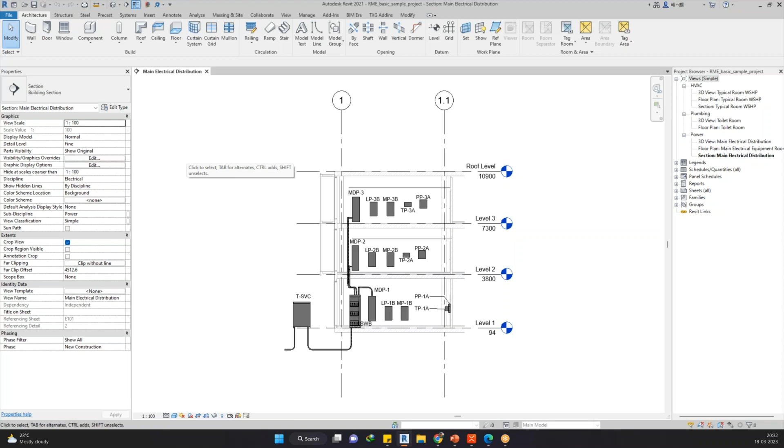Seriously, in my clients, if you see the companies who are earning like 200 crores turnover, they are not implementing automation, but the company which is not even earning 1 crore, they are using automation. Seriously. For example, my company. It's like a 3-year startup. Still, in our company for our projects, we are using automation. Okay, most of the companies in Bangalore and in Mumbai and Delhi, very rare, like 2 or 3 clients I've seen. Okay, fine. We'll discuss that later. Okay, so most of the people are completely zero, and my training is going to be completely from zero only.

I'm not starting from the mid. I don't consider you even at least 20% or 30% into Dynamo, and I'm not starting from the mid. It's completely from scratch. Not even zero, minus.

Okay, so I'm going to treat you like a kid, whether you are a manager, a coordinator, whoever you are. I'm going to treat you like a small kid who is learning something. You are now putting your footsteps into a different thing, a different language. Why am I saying it's a language? It really is a language, because it looks like a tool, but we can't say it's a complete tool.

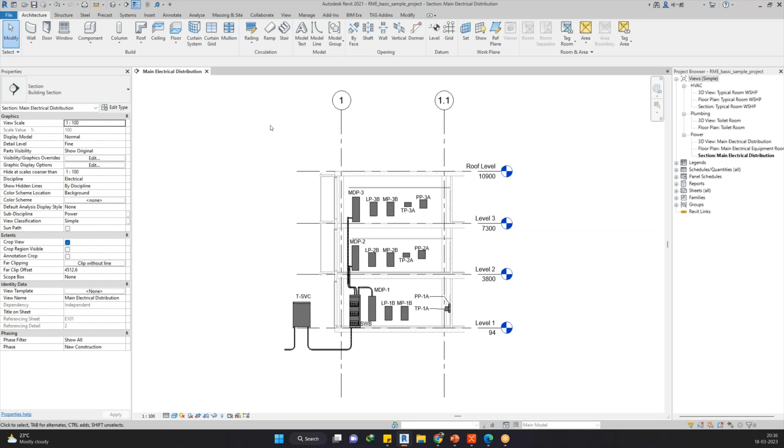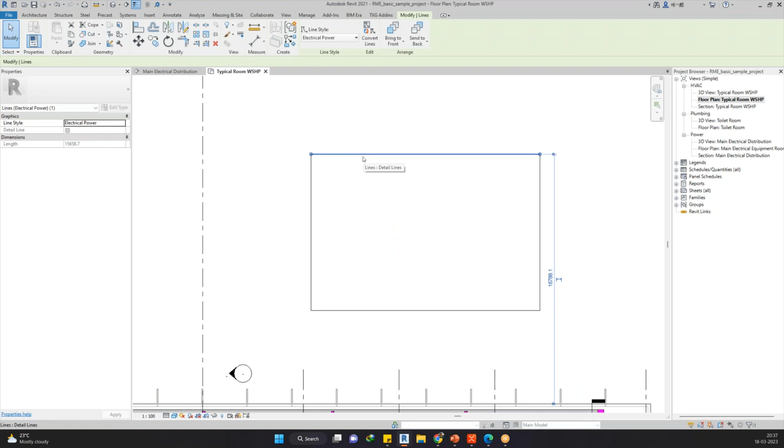Dynamo is an automation tool which helps. Okay, why should I give definitions? Let me show you. For example, I have a floor plan. Let's consider I don't have anything in it, so I have lines, or else I link the CAD file. I have an instruction that each and every line with the layer name wall has to be drawn like this. If you are new to modeling, you come to know this is the wall.

And here this shows a different wall. The wall type and other information would be here. What is its width? What kind of wall is it? Then I have to change the wall again from here, select this, and do this. The next wall would be rated with some sort of tags. Then I'll select this and do this. So how long will it take? And sometimes you make mistakes, correct?

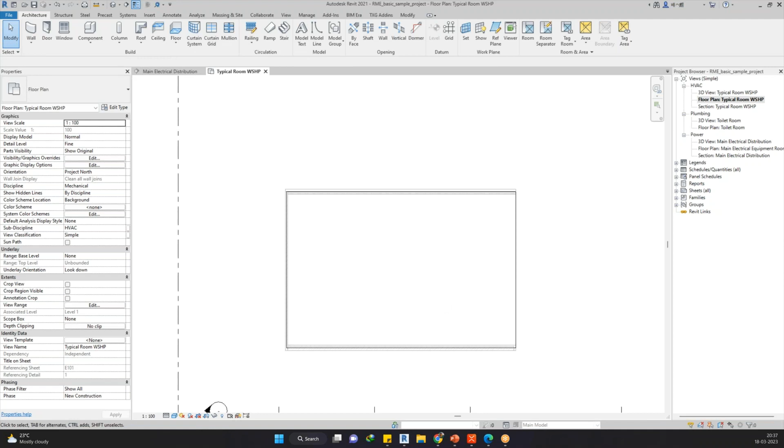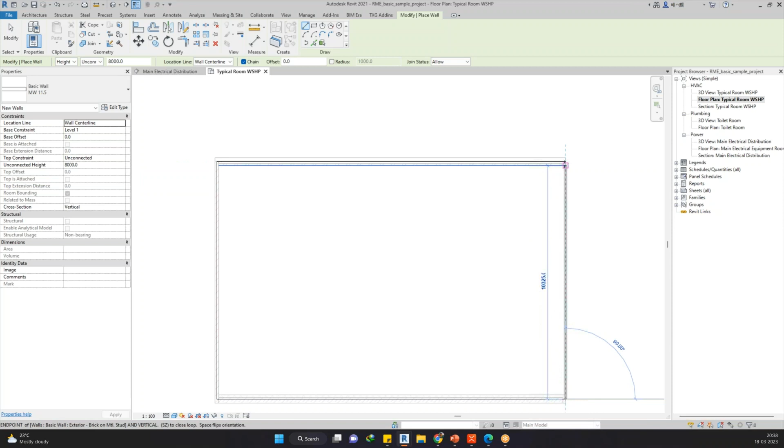But what Dynamo will do here is understand the layer name of this line and what is written over there. It will take those inputs as a human, and then it will do all these tasks. It will go to the Architecture tab, and in the Build panel it will go to Wall, select Wall: Architectural, and read the text. It will go to the family types, select that particular one, and start converting this line into a wall. Is this clear? Yes, sir.

This is just one example. Okay. So a person without a face who is helping you, a person without a face who is helping you to automate. I mean, let's forget about automate. He's helping you with his speed.

Hello. My question is, what is the difference between Dynamo and script? Oh, Dynamo and a script. You asked Dynamo and Revit? No? Okay, script. Okay. So Dynamo and the scripting, let me show you.

For example, this is Dynamo. I hope you are aware of Dynamo, correct? And this is the Dynamo interface. Can you make it a big screen? It's already on a big screen. Let me explain.

The display coming on the monitor, your laptop monitor view, is a little bit small. So if you can maximize that, you can hide the beam area. Not exactly, let me hide all. See, there is a bar here. You have to stretch this bar to the top. Then you can see full screen. Okay, fine. Thank you.

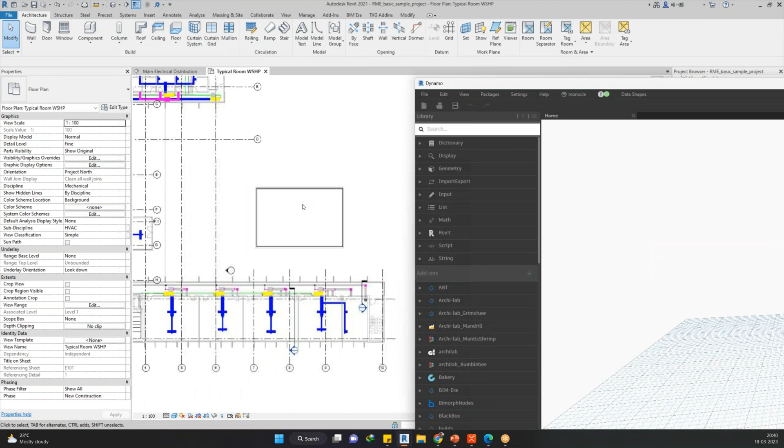Okay, Dynamo and the scripting. So these two are two different platforms. I'm not joking, seriously. Dynamo and the scripting are two different things. Dynamo is completely different. It is visual programming. And the scripting, as you said, is like programming. Let me show you. For example, I've drawn just four walls.

So select model elements. I am telling that I want to select some sort of elements. So I'm finding something here. Select model elements. I can type something here. So do you have any such node which helps me to select some model elements to extract the data or to use it for something else?

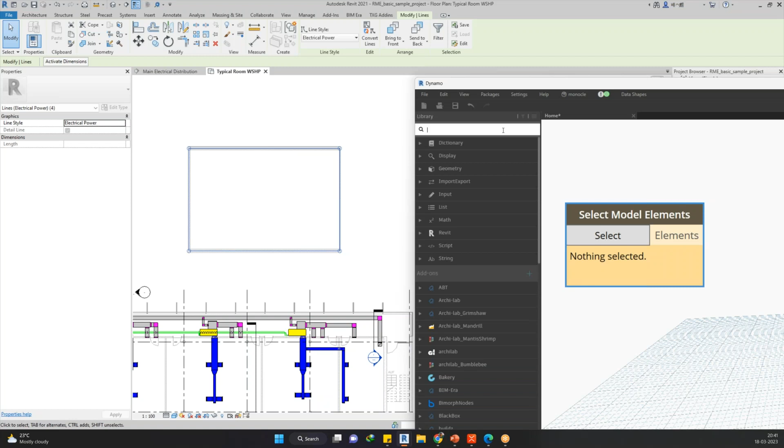So when I click on select, everything in Revit becomes grayed out. Now I have a chance to select all the walls. 1, 2, 3, 4, total 8 elements. So 4 are curves and 4 are walls. So I'm asking, Mr. Dynamo, I want to see what is this wall type and this wall type. How many wall types do we have?

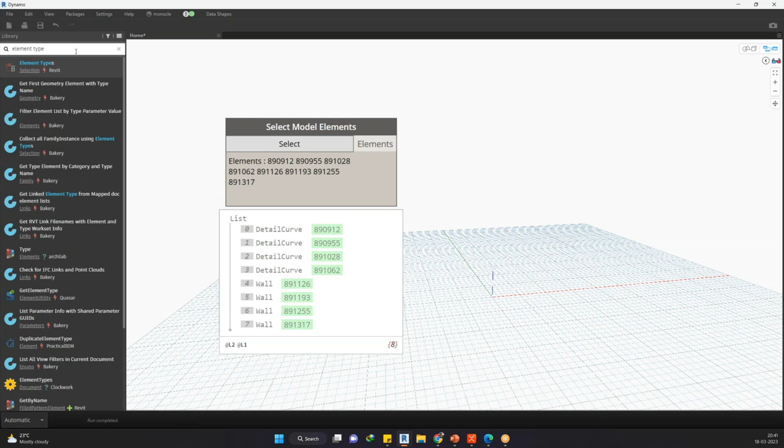So I have an element and I want to get the type of it. Here I can see 1, 2, 3, 4, 5. I got a node here. This node is not created by me, and not created by you. So why are we saying this is a node? Because the full form of this is no code. There is no code required to use this box. It is expecting an element.

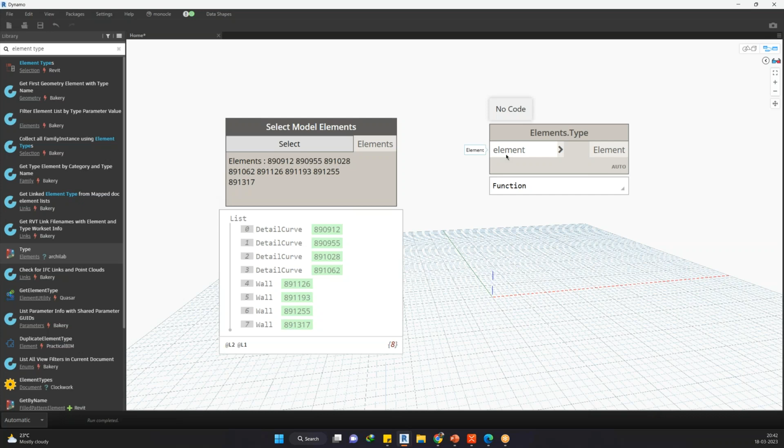Most people know how Dynamo works, but they don't know what to connect exactly, how to connect exactly. I'm going to explain that in just a couple of minutes. Let me clear your question and we'll get into the main stuff. Your question will be answered in 2 or 3 minutes. The main content is going to be explained in detail.

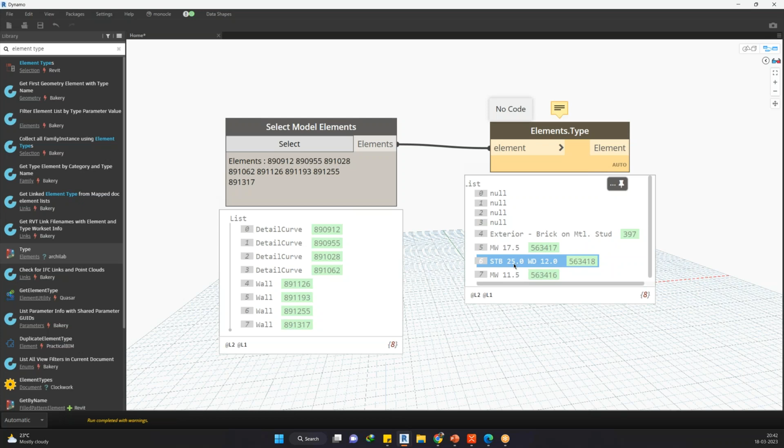So when I connect elements to the element input, it gives me exterior MW 17.5, STB 25.0, MW 11.5. So these are fine. This script is not created by me. But if I want to write the same thing myself, there is another process within Dynamo. It is called coding. Both are completely different. Why? I'm going to explain.

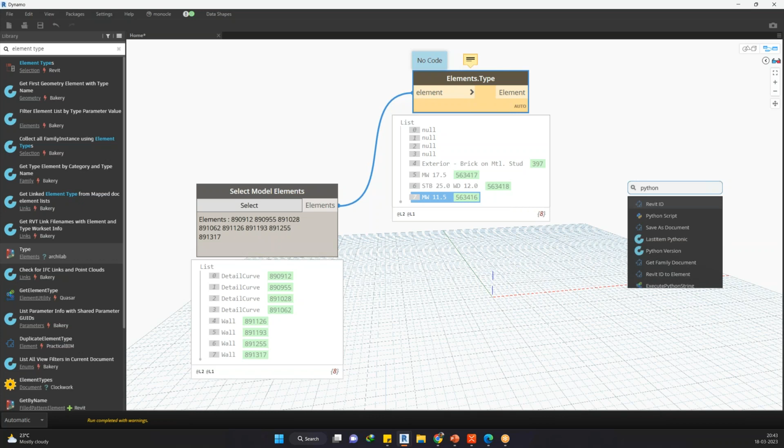For example, let's say Python script. When I double click, this is my coding interface. The Dynamo interface is completely different than this coding interface. So I want to get elements, so I'm going to connect some elements to IN0. This is somehow different. When I connect elements to IN0, I want to get the names of them. Dot name.

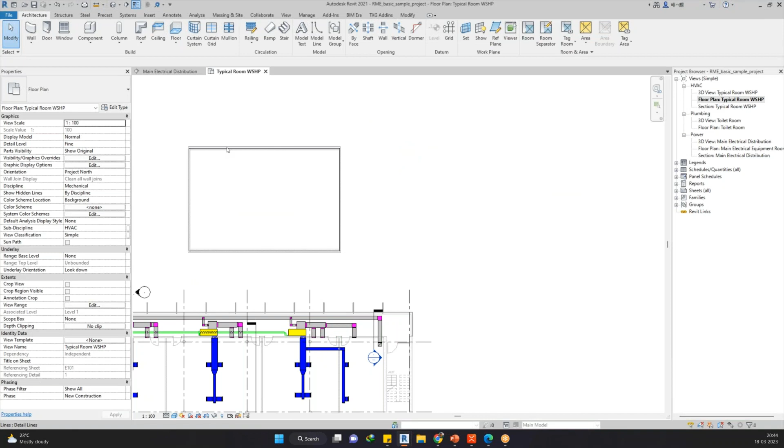Element dot name. What is this dot? Why have you typed name, and why is the N in caps? When I run this, why is it not printing? Why is it not exactly printing? Okay, if I select a model element, when I click on select, let me select a wall. So when I connect this, it is returning me.

I mean, guys, can you see my screen? Because everyone is saying that the screen is not visible. We can see it properly. No problem. Yes, all can see. Vijay, Srijit, could you please check? I can't help you in this if it is an audio issue. Let me stop the screen share, sometimes it happens. Now let me know, Srijit, if you can see it now. Okay, clear?

So this is working for one single element. But when I'm connecting multiple elements, it's not working. You should know the reason why. No, I want to see it at any cost. How? So in coding, you can customize the text here itself. So all elements, so unwrap. Let's say elements are going to be connected here. So in elements.

So let's dot append, and I want to get I dot name of this, and when I close it, let me write something instead. Don't ask me what this is, I'm just clearing your doubt. That's the difference between coding and this. So now it is working fine again. Do you see that? When I connect a number of elements, now it's working. Earlier it didn't work, but now it works with multiple elements.

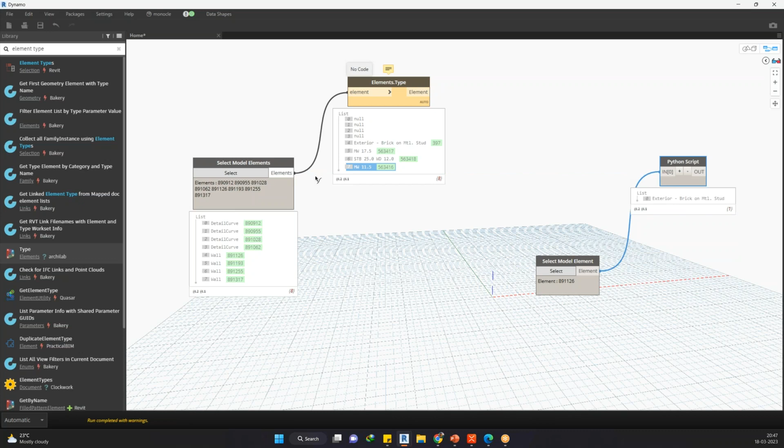Now tell me, will it work with multiple objects? It's working. It's working with a single element and with multiple elements. So this is our process. If you're very new to coding, you have to struggle with all these kinds of steps. If you are very new to Dynamo or to coding, this is what happens. You have to take different steps, and it's very hard to remember if you don't have any coding background.

You are from an engineering background, and you hate coding, to be frank, and you will never get into Dynamo at all. People say, "Arey, there is a quick meeting on automation, let's join." "Arey, I hate coding, please." I've seen many people when I was working as an automation expert. I sent invitations to help with their queries. I didn't ask them to write code with me, I just asked them to attend the meeting. Still, people don't like to come, because they have a negative opinion of coding. They feel coding is irritating and stressful.

Rumors, man. Okay, seriously. Once you get into IT, the way you choose a trainer, a guru, he should give you that kind of motivation for learning. You should connect with your trainers first of all. You have to learn it properly. Okay, fine.

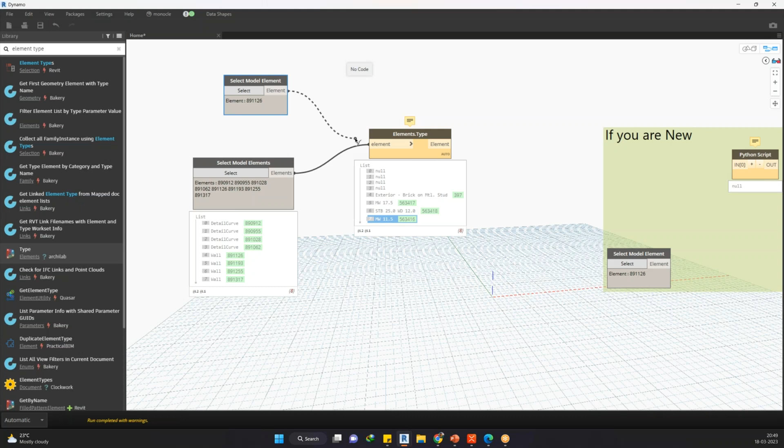It will work. It will work. No, it will work here because it will return an element type. It's working because we don't see these kinds of silly warnings with the help of Dynamo. Because the person who developed this code, they have written it so the user can select multiple elements, or the user can select a single element. So it should work with both cases.

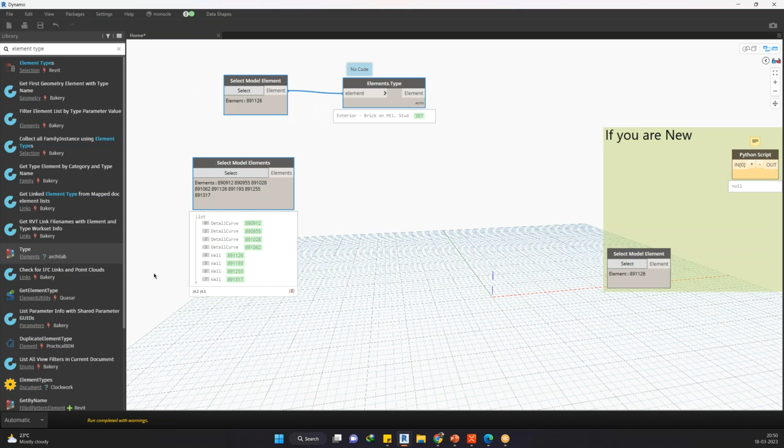The person who developed this code, I'm not the person who developed it. So in that case, how exactly do you get these things done? You have a strategy, you have a strategy that is called node finding. So you have to find the right node which helps you get the element type.

Rajesh, you have experience, so you got it very quickly. But how? What about me? How many hours, how many months will it take? How many years will it take to get the same experience?

Guys, I'm telling you one thing. I'm going to feed you my 5.5 years of experience—it's not 5.5, it's 6 now—so 6 years of experience in just a matter of 40 to 45 hours. Understand? My R&D experience, I've done thousands of hours of experience, R&D, and that's going to be fed in just a matter of 45 hours.

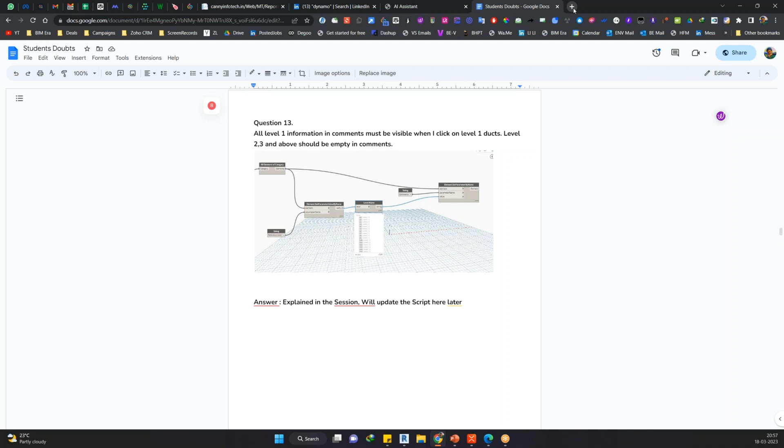And they got their answers in one single document. Every question gets answered in a document. Is that clear? So this is how it is. If you have any questions, first priority would be during the training.

But the next priority is, for example, when you are in office and you get stuck somewhere in the coding, when you are practicing, either me or one of the team members will help you clear your queries. So you will simply text me on WhatsApp: Rajesh, I got stuck somewhere and I updated the document, could you please check.

And question number 13—then if I'm available, I'll sit on it and clear your queries, or I'll forward this to some other person. After you finish, could you share a couple of questions with us? Not exactly, we'll see, because it's the company's property. Okay, fine, let me share. Okay, you can share me your questions, no problem.

Okay, fine, so data types is the main concept. So anatomy and node behaviors. Before we get into this, let me introduce myself.

I'm Rajesh Kumar. I'm the founder of this company, BIM Era Private Limited. We are very few people in it, a small company, just 15. We are purely into automation. We are helping a lot of companies with our automation services, like developing add-ins, creating Python scripts and everything. So why have we chosen this field?

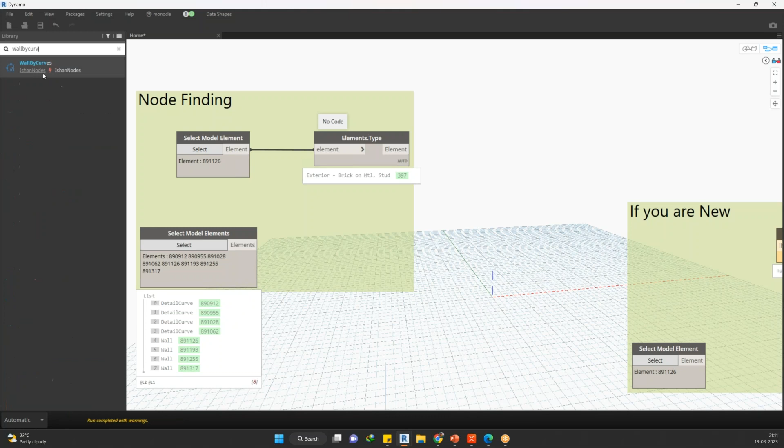Where is my Dynamo? Yeah, here it is. So if I say wall by curves, do you understand anything from this? What does this node do exactly? Just try to understand, this is called visualization. It is called pure visualization.

A person has created a script and named the script with something, it is called wall by curves. So let's consider this a file name, let's consider this a script name. Okay, so wall by curves. Anyone, are you able to understand anything from the name?

Anything from the name? It is clearly saying that you can create a wall, create a wall by curves, by selected curves, whatever. Is it clear?

Is it clear? So they can't name it exactly with this lengthy name, okay? Because, I mean, we don't suggest it. So that is the reason we simplify those naming conventions. So, create a wall by selected curves.

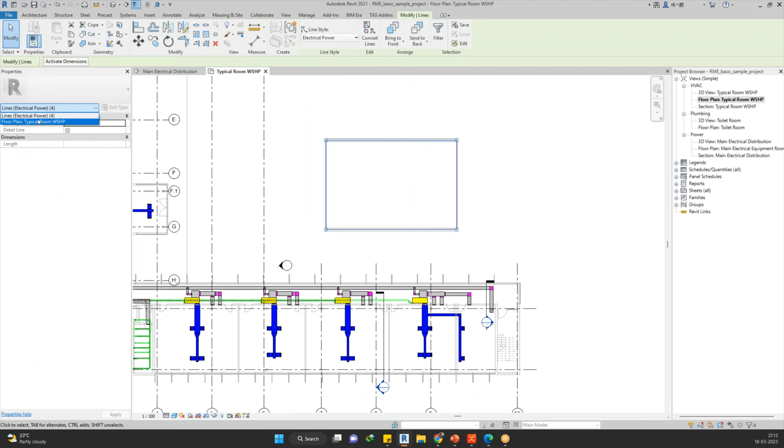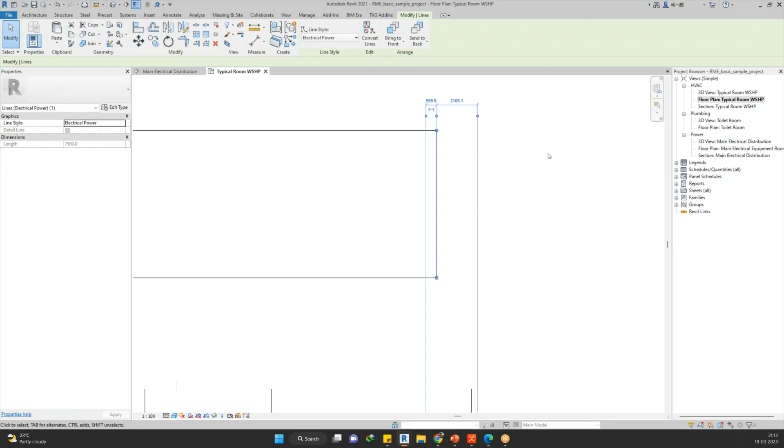So now the challenge is, if I have a wall, I mean if I have a curve here, let's say... no problem, let me try again. So I have a wall. If I have a wall, how to automate this exactly? First I have to select the wall. That is what it's asking, first I have to select the line.

So a line, we can call in geometry a curve, okay. Select the curve, and to draw a wall I have to type WA, and then I have to set the wall height exactly, so let's say 4000. That is what it is expecting, height, and which level I want to draw, and it is expecting another input, so level 2.

And that is exactly expecting here what kind of wall type it needs exactly. So wall type, I have selected something here, okay, and parameter name. What is this parameter name? To which parameter the ID and time is to be added? Oh, when I draw something, when I connect a curve and given the height of this, let me show you.

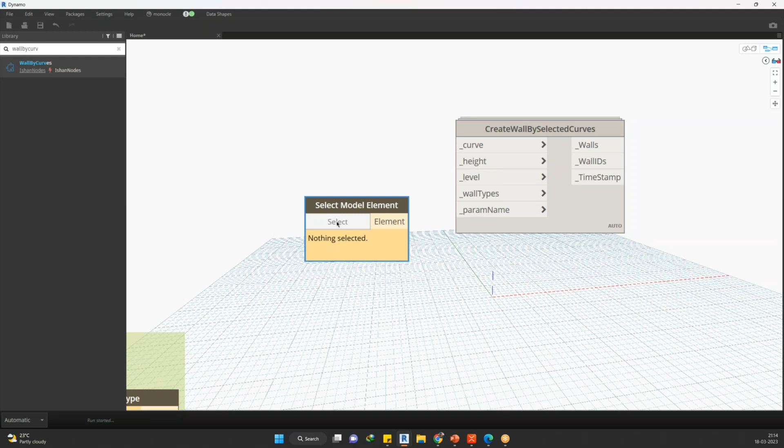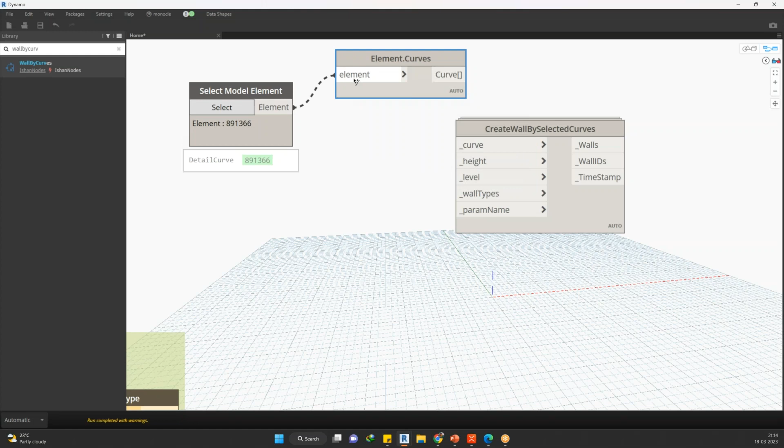Select model element. Okay, let me deselect this. Select model element. So I have selected a line, I connected this. I can't identically connect this directly to this, because this is a Revit element, and it is expecting a Dynamo element. So there is a process, you'll come to know that you cannot directly connect an element to this.

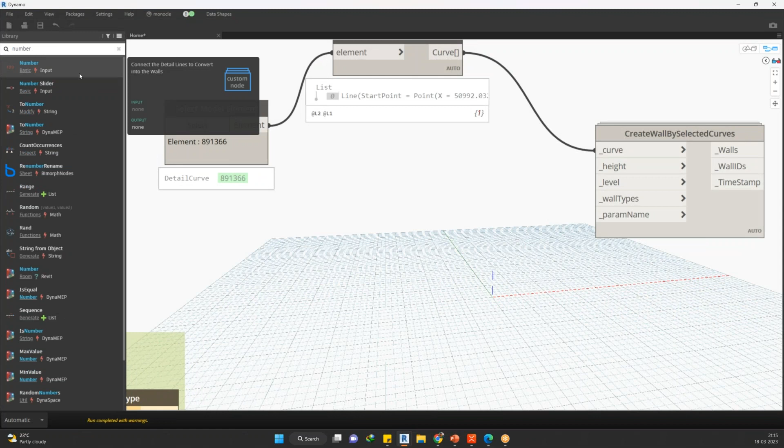Okay, so it is expecting height, so height is a number actually. So when I select this, okay, when I type WA, height is a number, so I have to type a number. So to type a number I use a number node, and I'll say 4000. Connect this to this, and it is expecting a level, so to connect the levels...

Let me try. Yeah, we have a node called levels, because this is a dropdown. Level is a dropdown, so I have to find a node which gives the level information with a dropdown. Simple, so I found that, so I said level 1, connect this to this, and now that is expecting a wall type, and even wall type is also a dropdown.

So let me check, do I have any node which helps give all the wall types, and it is a drop down. Let me connect MW 11.5, connect this to this.

Done. If I go and check, what is this parameter name? To which parameter the ID and the time to be added. The ID and the default value is already in the comments. So let me get into this.

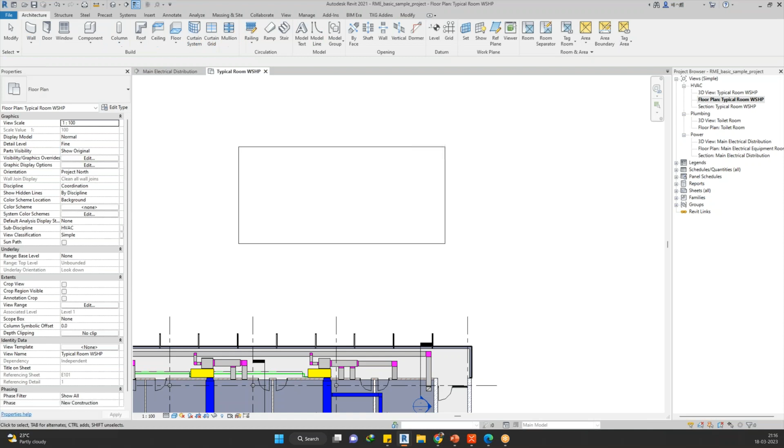Now, where is the wall here? Is it converted? No. What happened? Because element curves is already inside, so I can directly connect an element to this. Now the wall has been created.

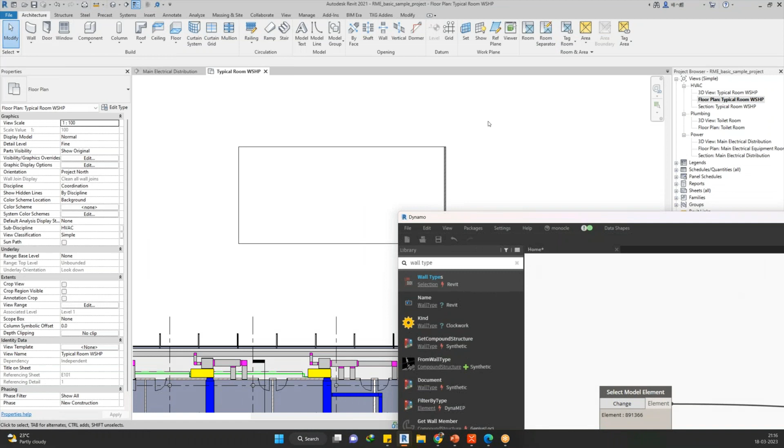If I go and see, I can see the wall, and the height is 4000, and it is level 1 and MW 11.5. Is it clear? So generally, whatever inputs you give, you'll be giving only once.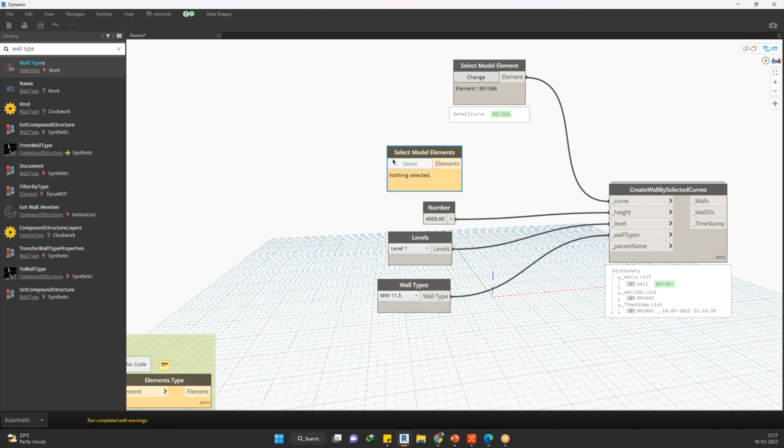If I want to try with multiple elements, same thing. Select model elements now. Select this. Let me select the rest of the 3 walls.

Simple. And when I connect this, what happened? Connect this. So all the 3 walls were connected. See? 1, 2, and 3. The 3 walls were placed successfully.

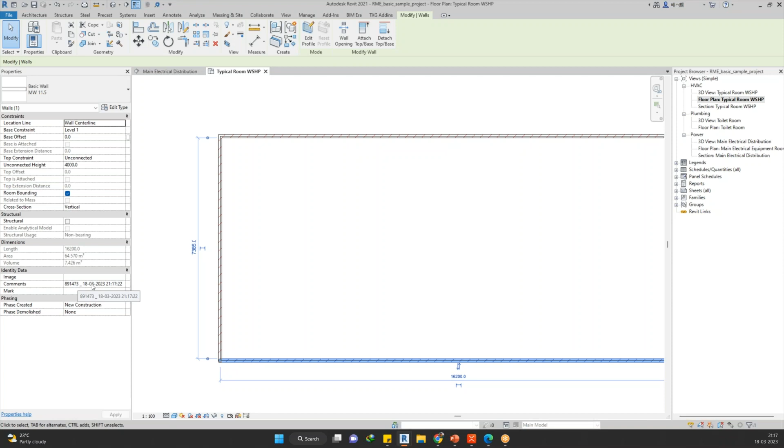Let's try to understand. So we're playing with 2 different sets of elements. It's a quite advanced question, but let me explain in just 1 or 2 minutes. So we have 2 sets of elements: one is a Revit element and the second one is a Dynamo element. So your node should expect something, whether it is a Revit element or a Dynamo element.

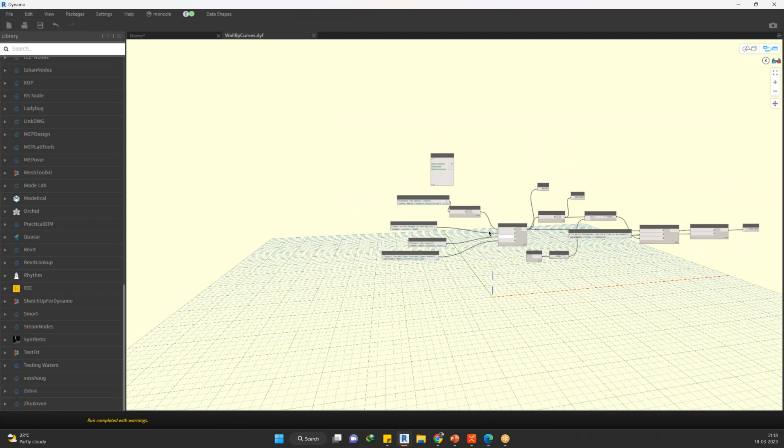So when I double click on this, I can see the code of how this guy was developed, and inside this already placed element dot curves in it. Did you see that? You double clicked on it and it went inside, showing you the code, and this is a different interface. This one is a yellow color interface and this is a white color interface. Both are different, like how you have a family editor. Let's consider this a family editor.

Clear, that this is a family editor. Inside we already have an element dot curves. It means whenever the user connects a detail curve, it converts that into the geometry curve and connects this to this. If not, for example, let me delete this. So the person who created it directly connected the detail curve to this. So when I save this and close this, now the script will not work.

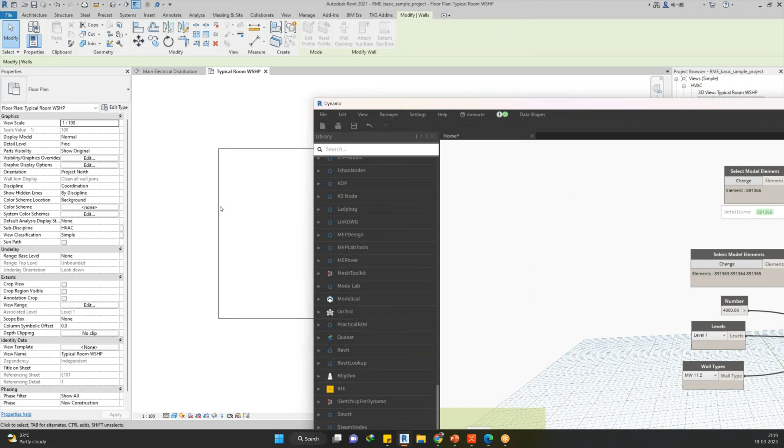I can't see that. Did you notice? There are no walls now. Yes, there are no walls now. So how do we fix that?

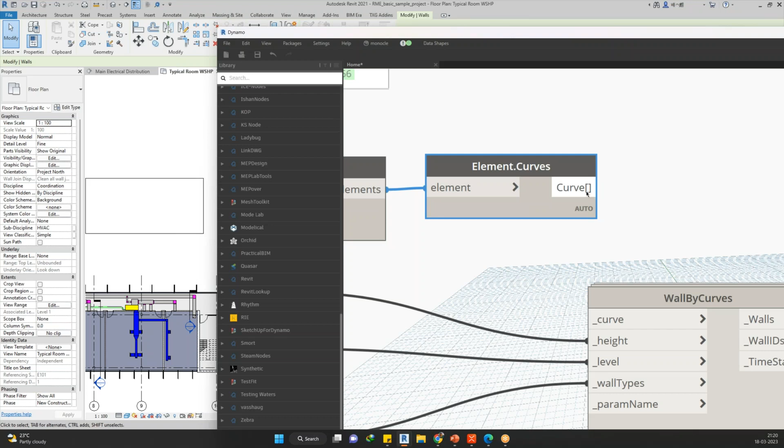I have to convert these elements to the geometry element. To do that, I'll be adding element dot curves outside, and I'm connecting an element to the element, and that is expecting a curve. So we have to connect the curve to this. Now it will start working again.

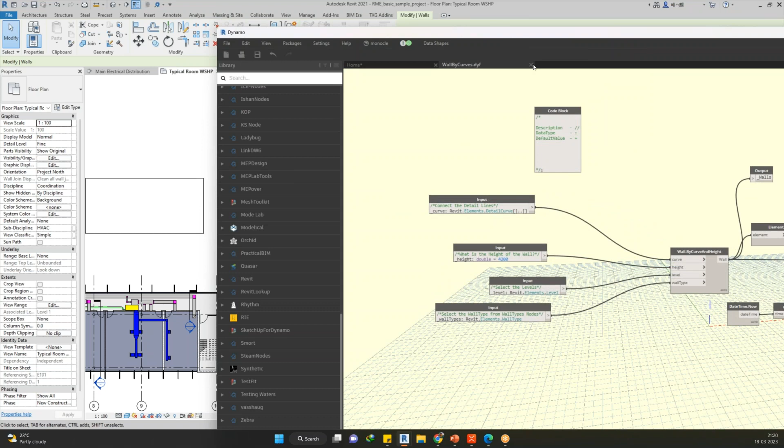So parameter name, what is this? Default value. So we selected model element from Revit, but Dynamo will not accept it directly. So we added a Dynamo node to change it accordingly so that it can. Clear? That's it. Sometimes it acts weird.

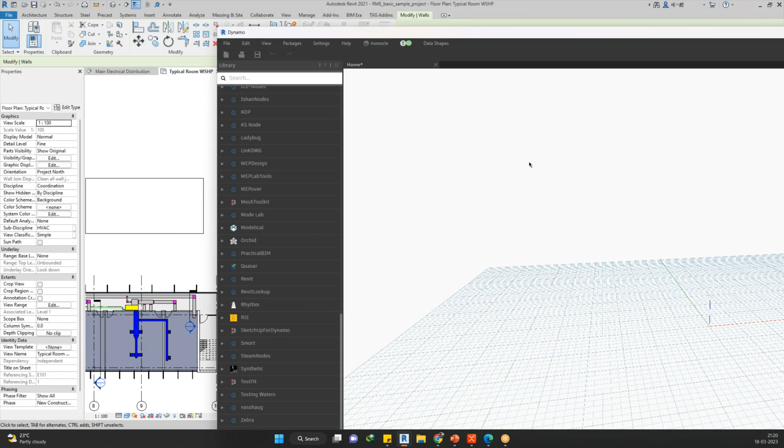This is how, let me copy this. Control N. Just a second, let me copy everything. Control Z, Control N. No, let me paste this. But still, it's not accepting.

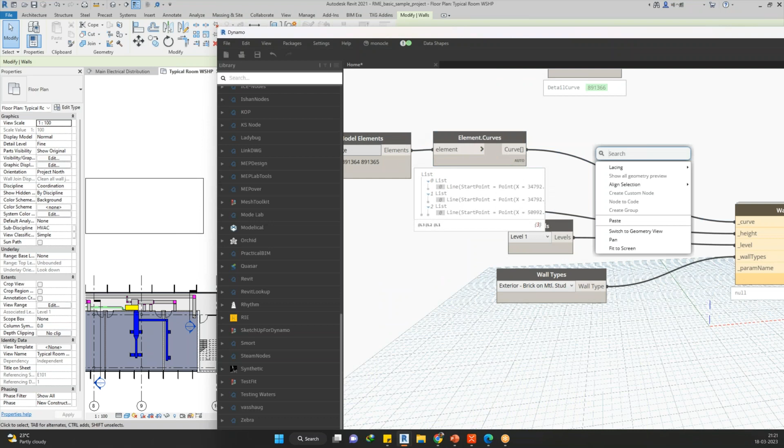When you hover the cursor: detail curve, double level, and this. This is expecting a line now. So here I have to convert, flatten. So you have to do these customizations; it is not exactly like playing as this. You are going to learn all those concepts in our training. When I convert this to this, still it is not accepting something.

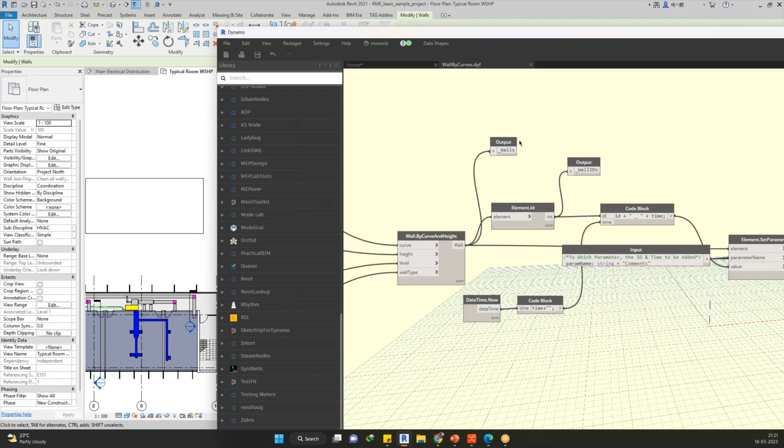Okay, that's the reason. You deleted model elements there? In which one? In the main node, this one? Create by curve, you deleted something there, right? No, no, not that. That's not the reason. It has some other reason. Okay, so this is a part of this actually. Where is that edge? So this is the problem with the dot notation. There are some sort of dot notation nodes there. It's because of that it's acting like that. You're going to learn these kinds of concepts in detail in our training.

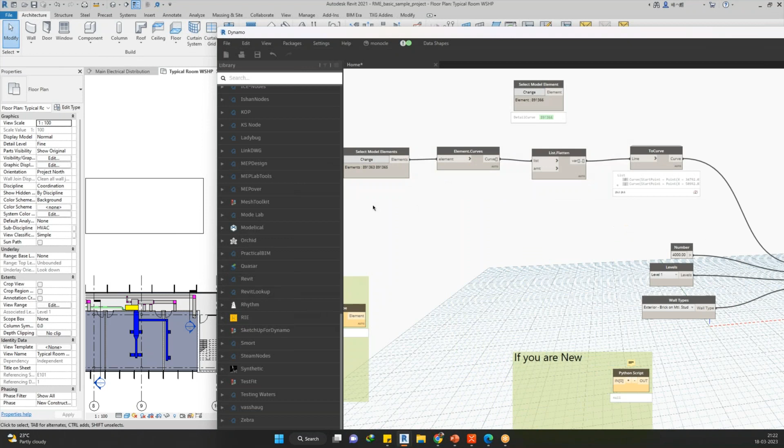Okay, clear. So Rajesh, small question. Vijay here. You are mentioning Revit element and Dynamo element. What is the difference actually? Is there any basic information for that? Not exactly. For example, you have a table in Revit, you have a table in Navisworks. Are both same? No, right? That is only the geometry.

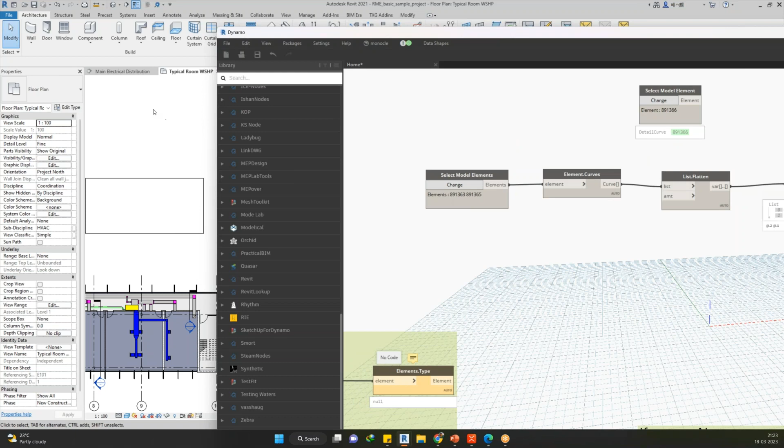It's lightweight. For example, if I see something here, I selected some elements here. So element dot geometry. When I connect this to this, I can see there are 5 panels in this. So this is a Revit element and this is a Dynamo element. Both are the same actually, but here it looks like an element, and here it looks like a solid. Is it clear now? Yeah.

So when you are playing with any geometrical stuff, with points, lines, curves, solids, or surfaces, if you have connected an element and want to extract some different information out of it, then you have to convert that element from a Revit to a Dynamo element first. Simple strategy. Otherwise it won't work. Your nodes will not work at all. Clear? Yeah. Thank you.

Then after that, we have a lot of concepts to be learned. For example, how can I move this? This is at 1250. My engineer asked me to place an array in level 2. I need 5 panels, place wherever you want. I don't have any inputs of at what height it has to be placed. So you have placed around 30 to 50 panels across all the floors. And then finally you have an input: change all the panels to 800 from the bottom.

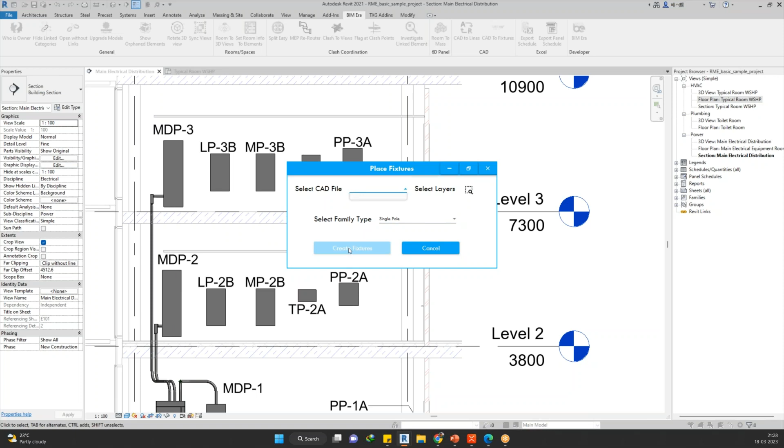This add-in was developed with the help of Dynamo. First we created the Dynamo script and then we converted it into the add-in. So simple. With this, you don't even need to adjust all the lights to the middle of the ceiling grids. Only aligning them would take a lot of days, agree or not? If a light is not exactly in the middle of the ceiling grid, it will kill a lot of hours, and you have to do a lot of cross checks.

When we do RCP layouts, we see a lot of clashes, like a fire detector very close to another fire detector, not even within a 3.5 meter radius. How do you handle all this? If you have n number of detectors that should maintain some radius, the automation will show you a warning if they're too close. The spheres will turn red, meaning two heat detectors or two speakers are very close to each other.

And if you miss a speaker in the restrooms, for emergency cases, it will give you a warning. So you can add your design instructions or your engineer's instructions into it. Understand? This is what it's going to be. Companies have started looking for candidates who can automate this stuff to save time in future projects. Fine.

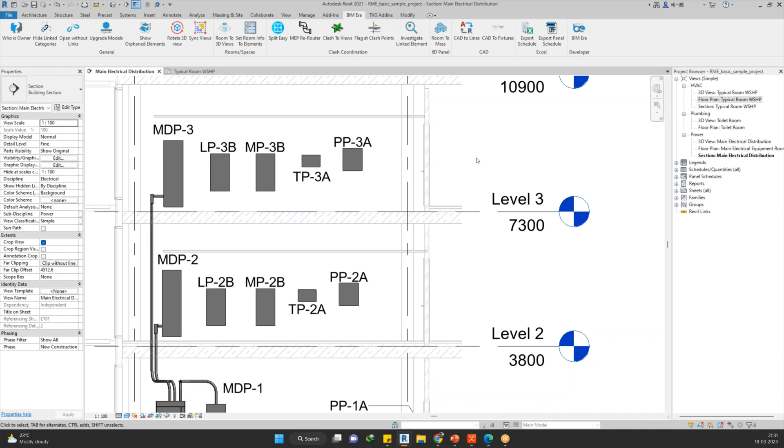But throughout the training, will you also give us these add-ins so we can practice as well? No, we don't give it for practice. It's very easy to use. Okay, fine. Thank you, Rajesh. Yeah, thank you.

Ashwin, one question. Once we learn Dynamo, can we create these add-ins, or is that related to Revit API? Very good question. That is different. Let me explain. This entire training is only on Dynamo. Don't look for any Python coding or add-in creation. Dynamo is only Dynamo. By the end of the level 1 training, you will be able to handle any kind of stuff within Dynamo itself.

Not even coding. Okay, not even coding. Clear? Okay, let me show you. Thank you. So data types is the first concept. Once you learn this concept, you will come to know how to play, what to play exactly, and what the node is expecting.

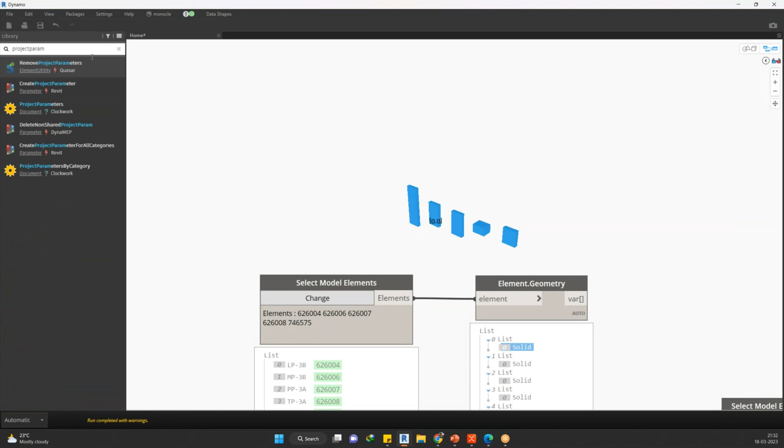For example, let me show you something. Create a project parameter. I have thousands of project parameters. Create a project parameter. So what is it expecting? It is expecting parameter names. So you have an Excel. So how do you get the parameter names from the Excel and connect this to this? So group name, what is this group name? Whether it's an architectural parameter or structural parameter or MEP parameter.

So you will be having groups, no? So what kind of a group is that? So what type is it? Is it a number? Or is it a text? Or is it a checkbox? Or is it a formula? Or what is it exactly? So what is this group again? Do you want to place this under identity data? Or under dimensions? Or under some other company information group, whatever it is.

Okay, so instance, I mean all these parameters are going to be instance or type. That's what it is asking. So for what categories do you want to assign these parameters? Is it for walls? Is it for panels? Is it for columns? Is it for sprinklers, or what exactly? So every information, you will be able to understand how to connect within this first concept itself.

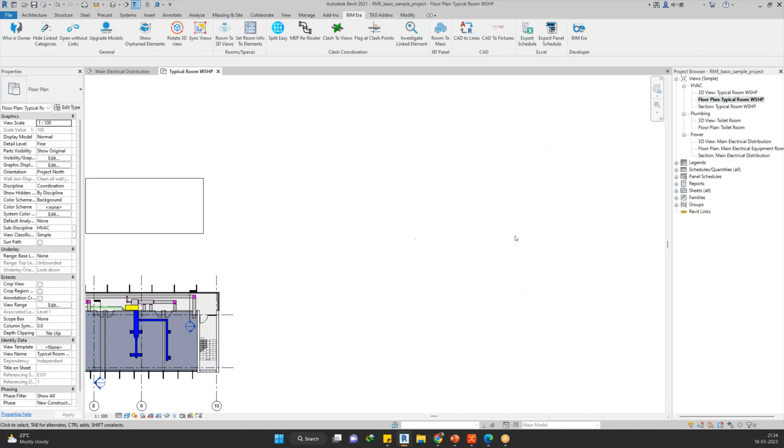Let's say, guys, you have a floor plan here. I'm the person who placed some elements, but I'm not able to see the elements here. What is the reason? Can you please text me in the chat box? I'm supposed to see an element, but I'm not able to see it now. What can be the reason? Tell me. View range. Very good. View range. Work set.

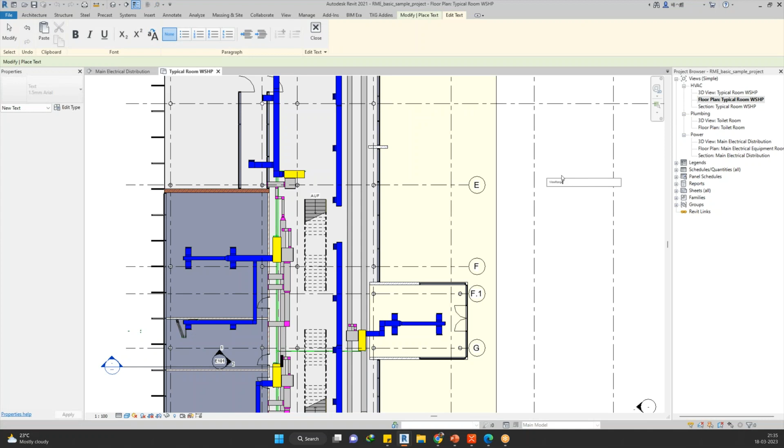Rajesh, can you repeat the question? See, I am the one who placed the elements in this floor plan. But I can't see them now. I know there are like 6 to 7 elements supposed to be here. So the first one, in model categories, maybe it is turned off. Work sets. Visibility. Maybe the discipline mode is different. Discipline. Very good. What else? By filter, it is hidden. Filters. Very good. What else?

Or maybe it is below the floor. Work sets will be off. Work sets, already written. Crop region. Below the floor. Maybe scope box. Plan regions or view range, whatever. Work sets, filters, maybe the discipline you are using. Phase. Element will be hidden. Element hide. Very good. Design options. Very good. That element is from which discipline? It could be anything, just an element, whatever it is.

So you guys are very active, saying if I can't see an element, it could be view range or visibility graphics or work set or discipline. So you first check the first thing. If it is not working, then you'll go to the second one. If it is not working, the third one. If you still can't see it, the fourth one, still not, the fifth one.

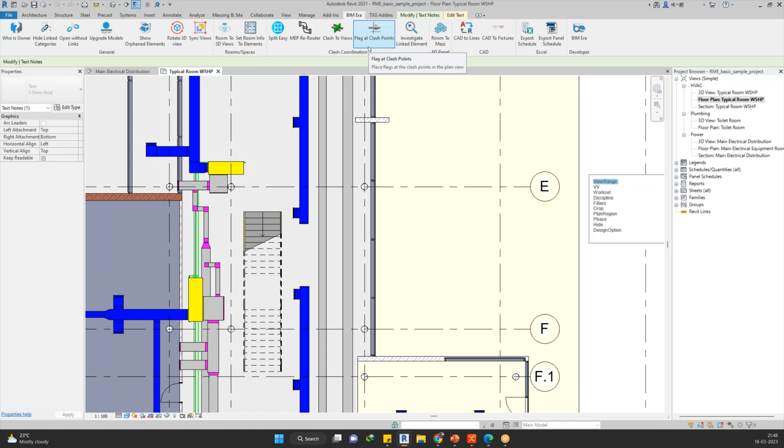Even we don't know, for example, if you type exactly the same stuff in Google, you won't get this solution anywhere. Even I'm somehow surprised where it is exactly getting this code from. So we used to kill a lot of hours to develop our own add-ins here, the BIM Era add-ins. We checked, can you please give me the code for the MEP rerouter and the clash to views and the flag at clash points. So it's giving me the code and it really surprised me. We have taken many years to get that logic, but it's given the logic like anything.

So then we decided, from the day we saw this, we started integrating OpenAI into the training with Revit Python. Generally, to get the logic it will take hours, even if you're a developer. And once you've got the logic, to write the same code and implement it on your interface, it will again take some minutes or hours. So you don't need to do anything. You simply ask OpenAI, it will give you some sort of code, and you customize it. Seriously, clear? So this is what it is.

Initially the level 2 training was 30 hours, but now it is 40 hours. You understand, that is how it is, because people keep on asking a lot of questions. We finished the same training in 30 hours itself, but the last batch took 10 more hours. The trainer is complaining to me, sir, after this integration people are coming with more questions. Let them come, clear every single question until they leave with a happy face.

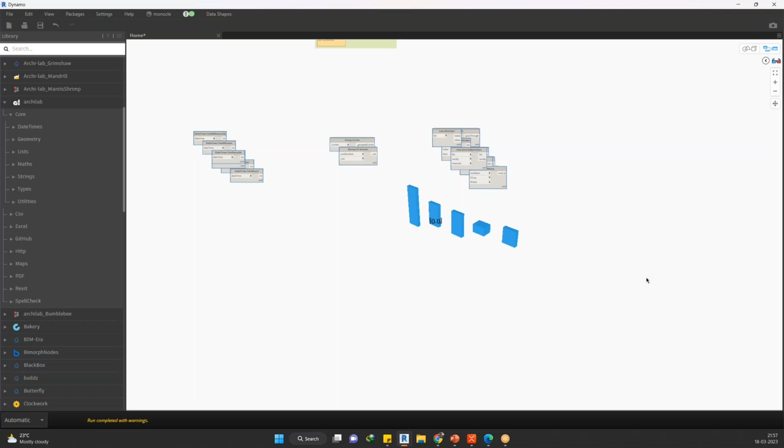On an average, I consider it 1,100, so it's 1,92,000. We have more than that, more than those scripts actually. But you should come to know how to use it, should come to know how to use it. That's what I'm going to focus on. Understand? Clear? Okay, fine.

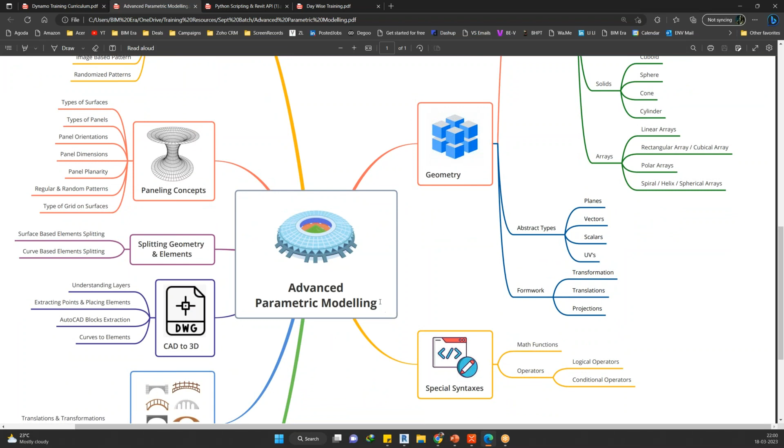How to play with points - what are points? We have coordinate points, reference points. When it comes to curves: lines, arcs, circles, ellipse - how to draw an ellipse, how to draw a polygon, how to draw a NURBS curve, how to draw a polycurve. I'm going to show you some examples. Surfaces - how to play with surfaces, solids, arrays, and planes, vectors, scalars, UVs, transformations, translations, projections. We have a lot here in advanced parametric modeling.

It is for people who are purely into geometry. For MEP people, it's not at all required because you don't create different structures.

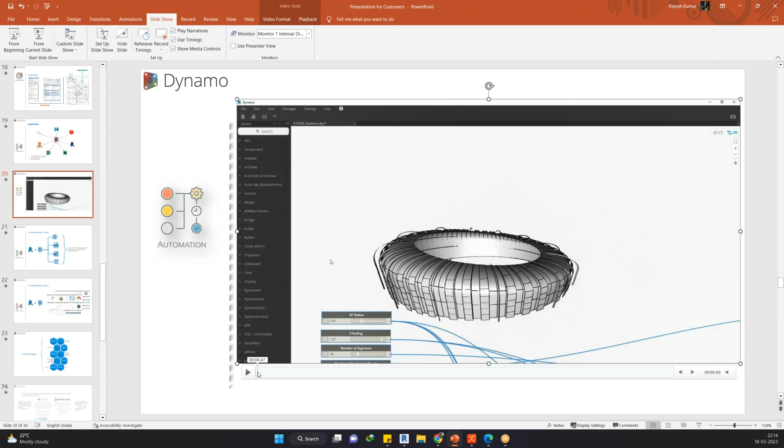I supposed to present everything today, but I want to explain this to you. Is it like scheduling in Revit, Rajesh? Whatever, similar to it, not exactly. Yeah, exactly, scheduling to it.

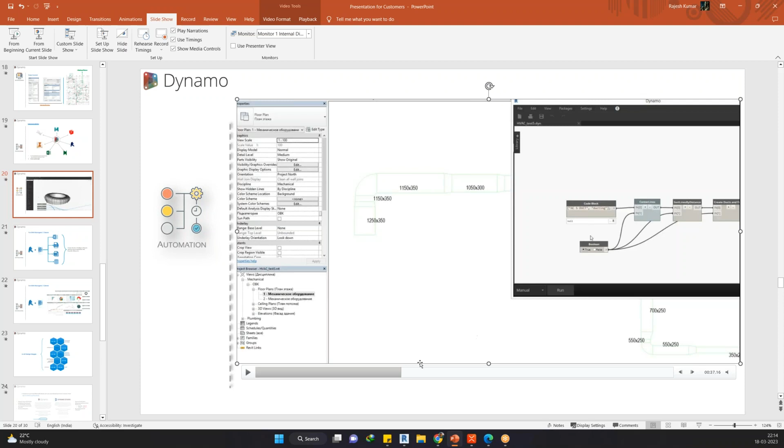So I have CAD layers here. I have a CAD layer, it is understanding the lines. So the input is what we have connected here. The layer name, if you see this, the layer name. And what we are going to do, we have written something in Python here, and boom, the lines are converted into 3D objects.

So this is the reroute, MEP rerouter. This is the MEP rerouter actually, we have already developed. Builder's work, wall openings. So we just created wall openings.

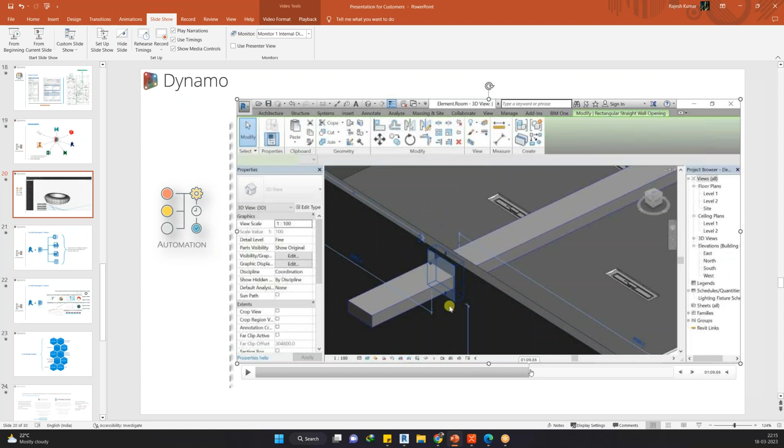Where is the main one? If you move anything, the openings will be also moved automatically. Yeah, this is the one. So we have extracted this. If you notice this, let me play.

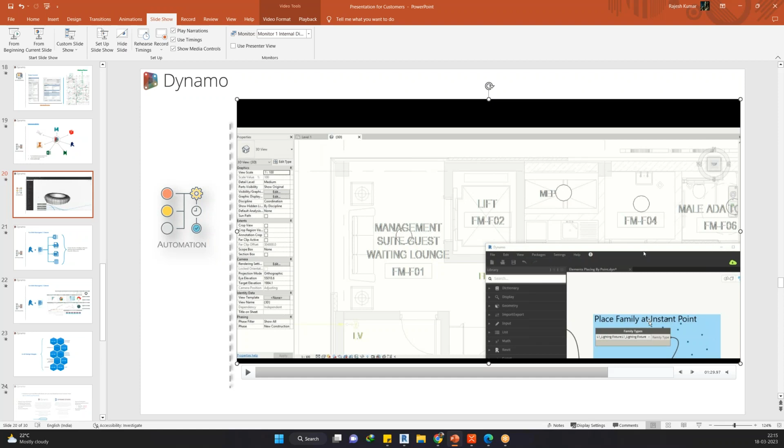So we have CAD points, we have a CAD, and we got the blocks with the help of data extraction method. If you're not aware of it, just Google it, like data extraction in AutoCAD. It'll give you some videos. Look into it. You can extract this center point of this, and that center point will be connected to this Dynamo.

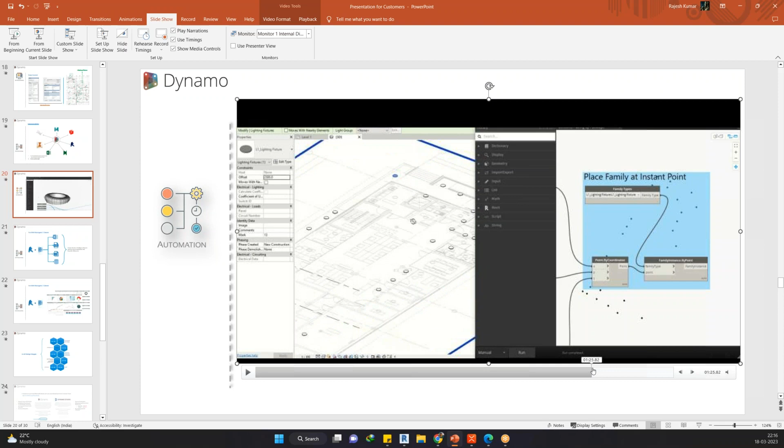And on the exact same points, it will be directly connected to the ceilings on the same positions. Simple, clear? You can automate anything, and CAD to Revit is a very, very easy concept. It looks very complicated because if you see something you are not aware of, it looks like a very strange thing and you can't handle it. But you can easily do that, trust me, trust my words.

Fine, so yeah, someone has a question. Who is that? Yeah, Rajesh. Yeah Rajesh, this is Akhil. Yeah Akhil. As I can see, you are mostly linking Dynamo with Revit. I'm basically a highway engineer and we don't use Revit at all. So our main software is Civil 3D and we do have Dynamo in Civil 3D. So if I join this workshop or training, how far will it be beneficial? That's what I want to ask.

Nice question. We have Dynamo and these nodes and all, Dynamo is same, so everything will be same, but the elements will be different. I was just thinking I'm not teaching Dynamo here, Akhil. To be frank, I'm telling you, I'm not teaching Dynamo here. I'm teaching a visual programming concept.

Even if you have seen our curriculum, you haven't seen anywhere I used any Dynamo concepts here. Any Dynamo concept, have you seen any? I'm playing with the Dynamo elements, Revit elements. Do you see anything? No. I am teaching the concept which is visual programming. And to explain this visual programming interface and concepts, I need an interface. You understand? So I am using Dynamo as an interface.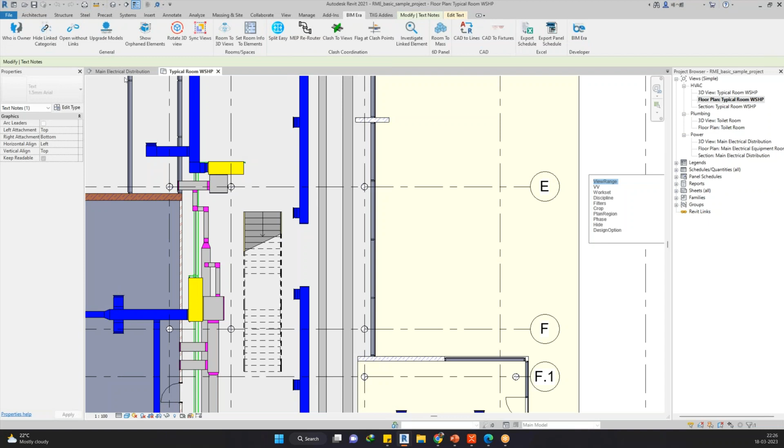Dynamo API: understand the hidden data of Revit elements and how Revit performs all the tasks. That needs API to understand what is there and why it is exactly. For example, can you tell me how many element IDs there would be for one single element? Only one, no? Correct? Yes. Very good. Let me show you. Let me prove you all wrong, whatever your 10 years of experience. Okay, fine.

I think everybody has played with Navisworks here. When you copy an element ID from Navisworks and paste it into Revit, sometimes it won't show you the element; instead it will be completely grayed out. True? You faced it before? Yes, due to the movement of the model, it gets deleted. It is not movement of the model. Let me show you what it is exactly.

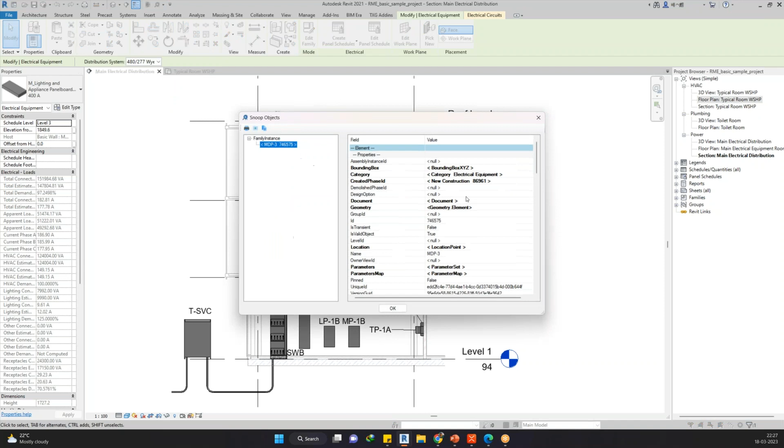So when I select this, we have an API tool. This is the actual properties palette for BIM developers. This other one is a bullshit one. This is the actual properties palette for developers. So when I click on this, there is an ID 746575. 746575 is an element ID.

I want to know where this element is coming from in the Revit hierarchy. Instance is coming from a type, type is coming from a family, and family is coming from a category. Correct? Yes. So what is the type of this element? I'll go and check get type ID: 619617. So this is the second ID for the same object. Sometimes when you copy the ID from Navisworks, it is copying the type one, not the element one.

So where is this type coming from? It's coming from a family. So where is that family information? When I click on this, this is the family ID, 741874. So where is this family coming from? It's coming from a category. So where is the family category? This is the category one. So where is the category coming from? I don't have any parent for this category.

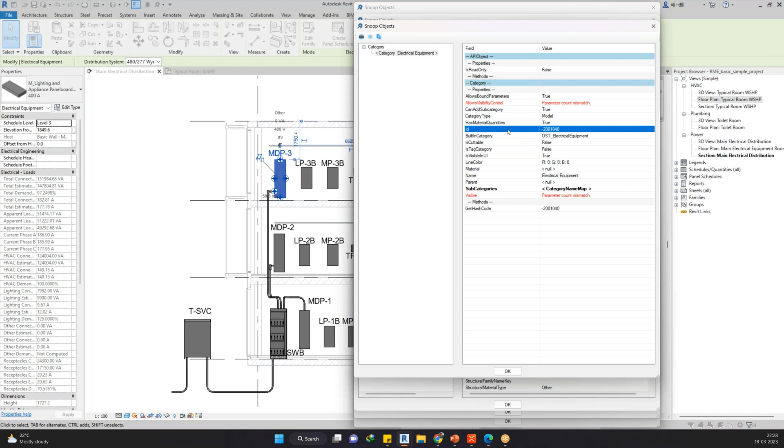So category is the grandparent. Category is the grandparent of the type, and family is the parent. And from that parent, you are reading the information. Is it clear, everyone? Yes, sir. So we have complete data hidden in this.

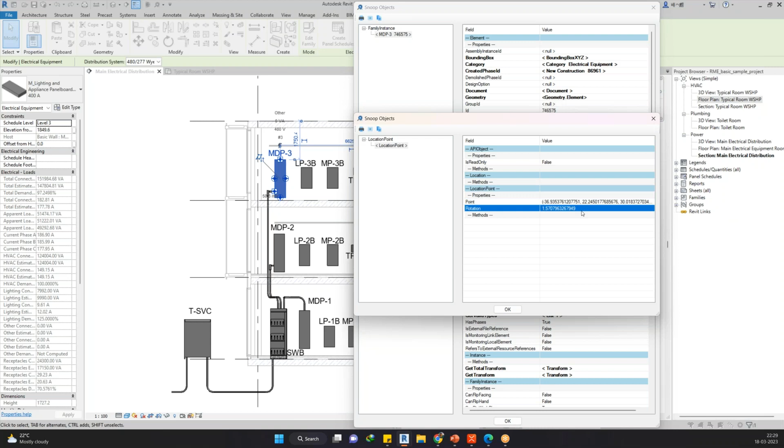For example, I want to get the location point of this. When I click on this, it's showing me the XYZ points here. Understand? So what do you do with this XYZ point? And what is this rotation? If it is 1.5, I can see if the door is placed with the right rotation or not. Do you understand? There are many like this.

Okay. Fine. What else? Any other questions?

Any other questions? Rajesh, Syed here. I have two simple questions. Yeah, I just want to answer.

You have mentioned the Dubai Infinity Bridge model. Okay, the Infinity model. I have a question: one guy is well versed in visual programming concepts, and another guy is good in the modeling part. What will be the time ratio between both when applying the same building in Dynamo and using BIM modeling like Revit?

Okay, good. For example, have you heard about this generative design concept? Generative design concept. Okay, let me explain. So there are concepts where you will be creating one system, and that system will generate n number of ideas, n number of designs.

For example, you have a client meeting, Refrain. Is it your name, Refrain? Syed Imad is my name. It's the admin name, it's showing as a reference. Okay, fine. You can call me Imad, Syed Imad.

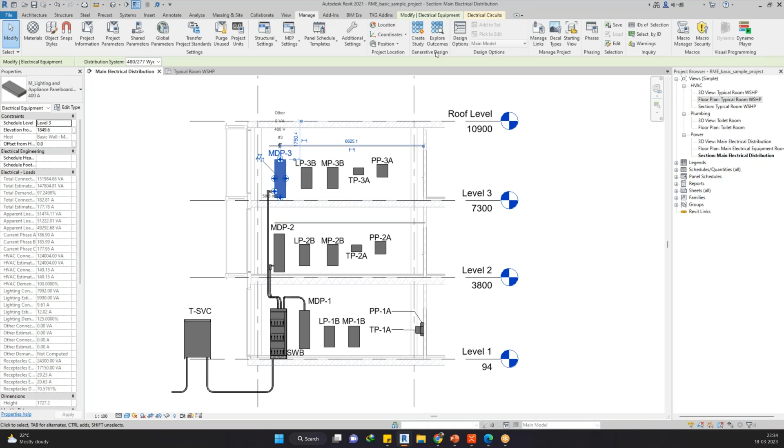The reason, for example, you explained ChatGPT. Yeah, the reason, if you are using nodes, let me explain. For example, I started using this node, and I created a script today. After 5-6 days, if you open the same script, it won't work. You keep on banging your head like, it's supposed to work like 1 week ago, but now it is not working.

The reason could be the way you connect the inputs, or the functions have been changed. It could be anything. So it's not only one single reason. We can't blame this node. What do people do? They just remove all these connections. This is a useless node, man. This won't work. Let me delete this, and then start placing one more node. Again, it'll face the problem.

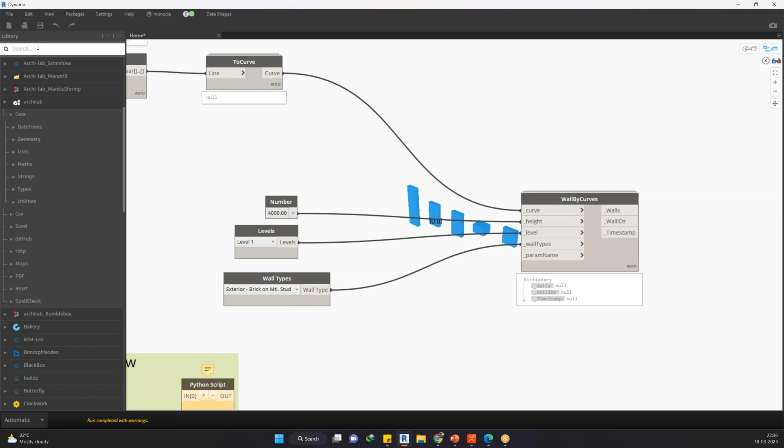Actually, you have a node here that's supposed to work, but there's a very small single thing. If you sort it out, if you find out what is the problem, then you can easily understand. So that's what I'm saying: if a node is not working, it doesn't mean the node doesn't work at all. You have to understand, when I connect the curve to this, what is it expecting? Is that connected in the right way or not?

So what is this expecting? Whether it is 4200, what is this? Why should I connect 4000 outside if it is connected at 4200 inside? So it could be a reason your node is not taking any inputs. Okay, so there are many reasons.

Rajesh, sorry to interrupt you. Actually, this is not my question. What I asked: you have shown a staircase and asked why we can't see the staircase in the floor plan. Then everybody answered view range, worksets, filters, the same sort of answers. I think you missed the part. That is the reason I explained.

If there is any element missing in Revit, you have certain reasons why it is not displaying, why you can't see it. At the same time, if you have a set of nodes and the nodes are not working, you have n number of reasons to fix that node, to find the right node. You understand? You may have to change the height, the level, the wall types node, the curve node. Maybe you have to connect this to this, or this to this. Could be any reason.